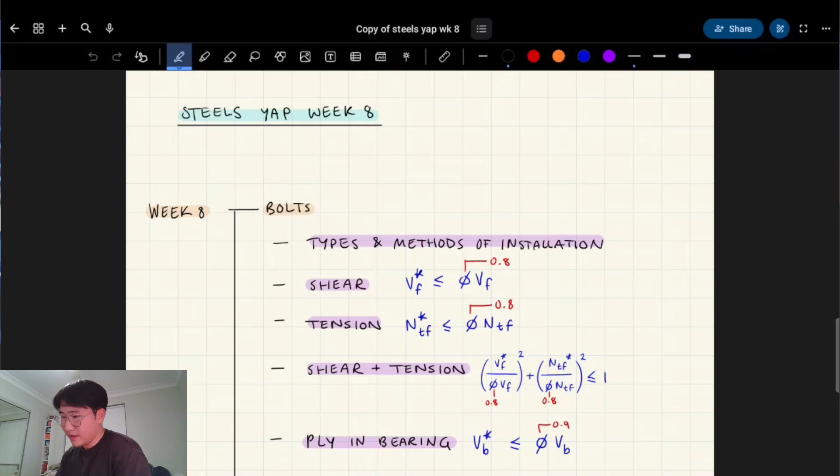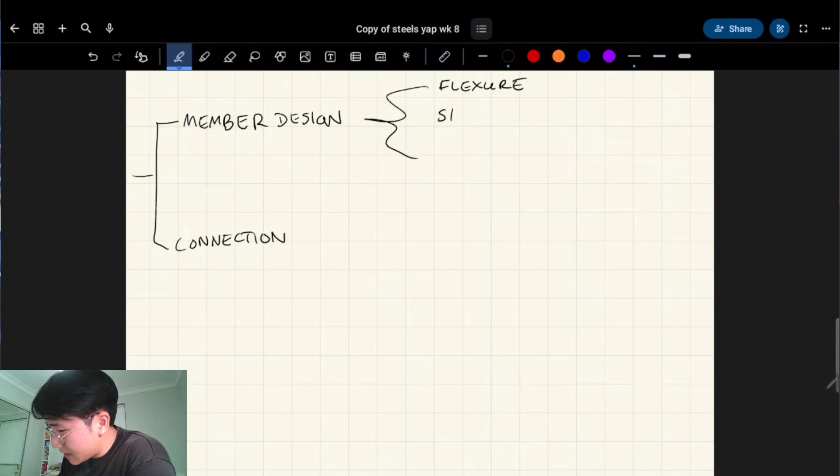Basically, within the connections topic, right? Actually, let's start even more overall. We have members. We have member design. Maybe that should go above because that's arguably more important to begin with. Member design for steel, right? And then that's where you do everything like your flexural checks, your shear checks, compression, tension, all these things. And we've kind of ticked through all these things now. We kind of know them, right?

Connection design is a little bit different. So connections is basically how two members are connected. It's kind of more like a later stage design thing, I guess you can say. It's just as important, but how members actually link together and are physically assembled, that's quite important, right? Because that's how you actually end up building it. So to do this, we have bolts and we have welds.

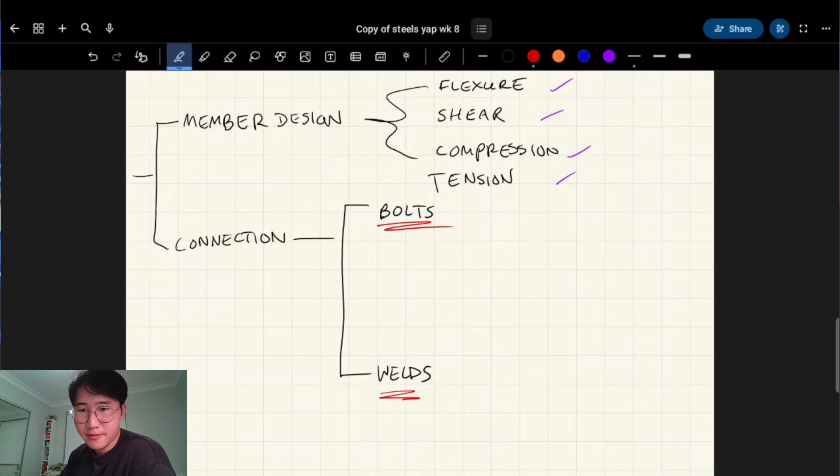Bolts are generally cheaper and are easier to assemble. You have your blueprints, which is like the same as a Lego instruction manual, basically, just to be able to assemble things with bolts. With welds, it's a little bit harder, unless you can prefabricate it in a factory. So sometimes you have these big members, and plates and things like that can be pre-welded so that you can bolt things together, and that's done in a factory. That's completely fine. For welding on site, that's actually quite difficult, and you try to avoid it as much as possible.

But welds, they essentially develop as strong of a... I'm finding it hard to explain this. So you have two members, two square hollow sections. This is kind of a weird example, and the other one's linking up to it. You can weld around the entire edge, and it's as if it was one square hollow section. The weld kind of fully fixes this connection. It has full rigidity and everything. For bolts, a bolt by itself is a pinned kind of connection until you have enough that it locks it in place, basically. Yeah, anyway.

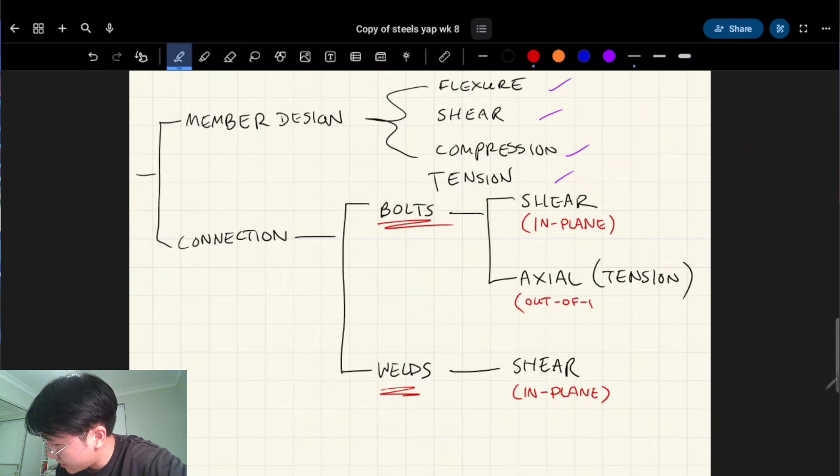So within these types of connections, we do two types of design. We do shear and axial, specifically tension design. For welds, we just deal with shear design in this course. That's not to say welds don't take on axial forces, but in this course we just deal with it like that. Shear we call in-plane loads, and this is also in-plane, and axial design is out of plane. Okay, I'll explain that in a second. Maybe I'll just draw up some examples.

So say you have a frame like this, and you're trying to prevent wind loading on it. So you might want to have bracing on it. If we zoom in on the bracing, you might find that this piece of bracing can't fit on the truck because it's too long. Let's take a step back for a sec. In the middle here, we might have a way to interlock these two members in a shear connection. So it might look like this.

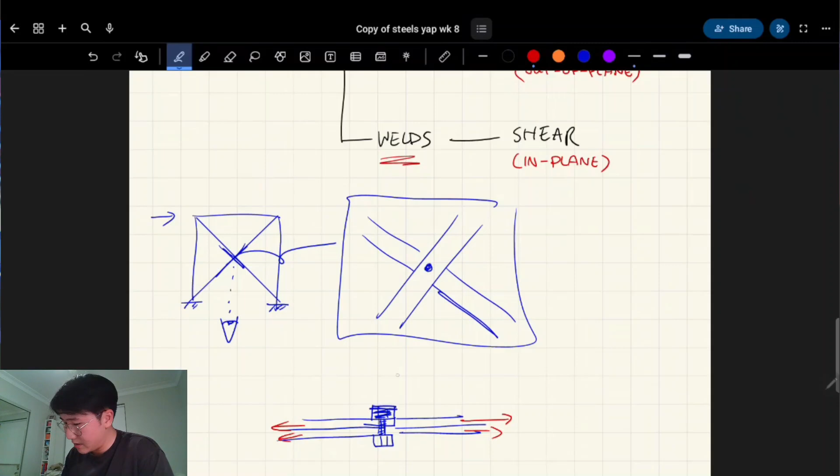Now that bolt that I've drawn here in the middle, let's zoom in. That bolt is in shear. I might draw it from the other perspective, as an eye looking at it. It might look like this. Okay, that's a bit trippy because it's an X, but that's your bolt. It has the shank with the threads, and then connects up to a washer. If there's tension or compressive forces here, axial forces acting, the bolt is in shear because this is essentially wanting to shear like that. So we say that that bolt is in shear because the bolt is perpendicular to the members.

Does that make sense? I just want to make sure I'm not just saying random stuff. No, that makes sense. Okay, fantastic. All right, good. Stay with me.

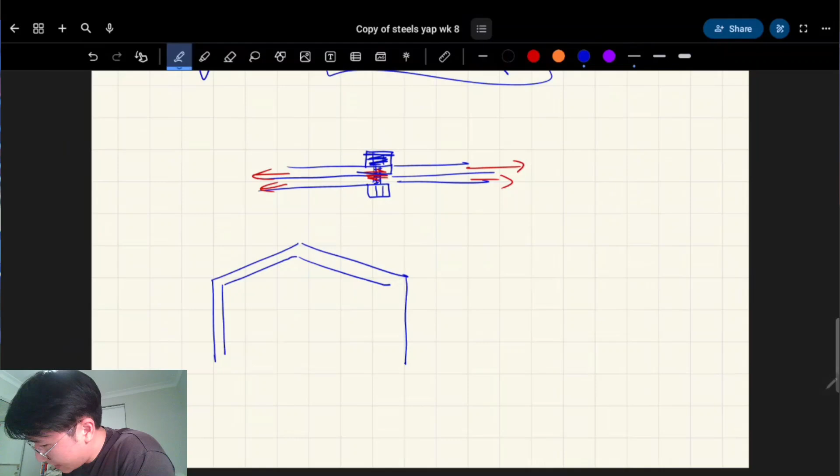So next we'll talk about axial bolts. Say we're designing a warehouse. Up the top there, that's the roof of the warehouse, and these are called rafter beams, and they're attached to these columns, and this makes up one portal frame. Now, you know how for a second I was trying to explain something here?

Imagine that these rafter beams are quite long, right? Say this entire span here is like 20 meters or something, right? And on a truck, I'm gonna try to draw this. On a truck, this isn't a very accurately drawn truck, but these members can only be max 15 meters, something like that, right? So they have to be less than 15 meters.

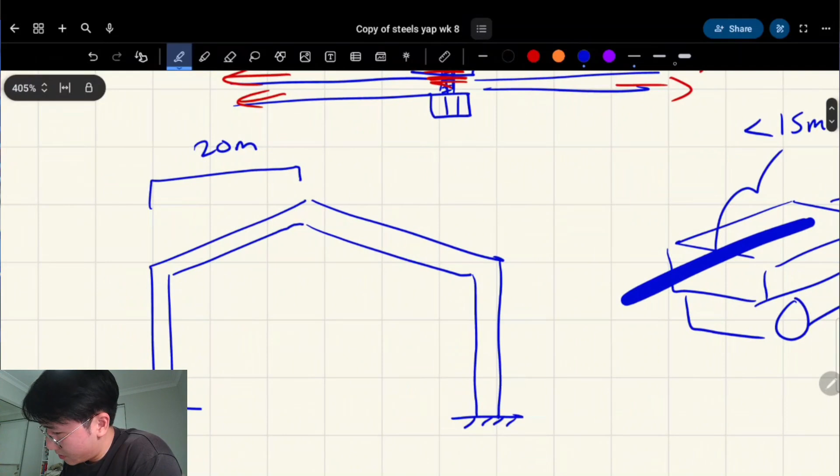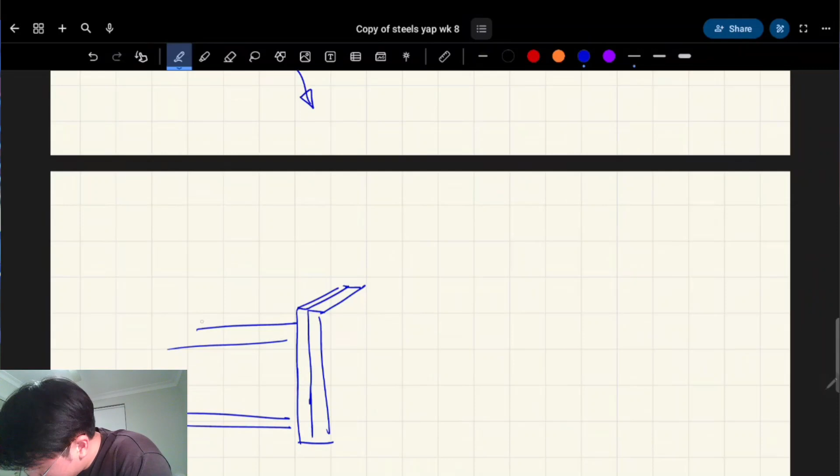So if you want to basically connect up this big portal frame, you want to essentially put multiple members on the truck like that and find a way to connect them together, right? And so let me just draw that there. That's the bottom of the page. That might look something like this. I'm going to draw a perspective drawing. And these are, say, the I-beams or whatever, right? Like that. It's an I-beam.

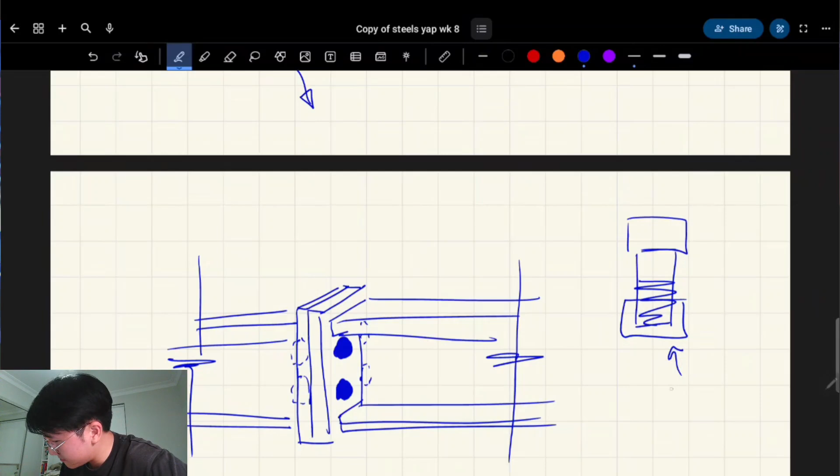That continues. And we have these bolts, right? These are axial bolts. Here, and there's some on the other side, but you can't see them, right? And then they have also got a nut basically on the other side, which locks it in place. It's something for the threads of your bolt to bite onto, and you twist it, tighten it, and so that's the nut. So your bolt, those are your threads, right?

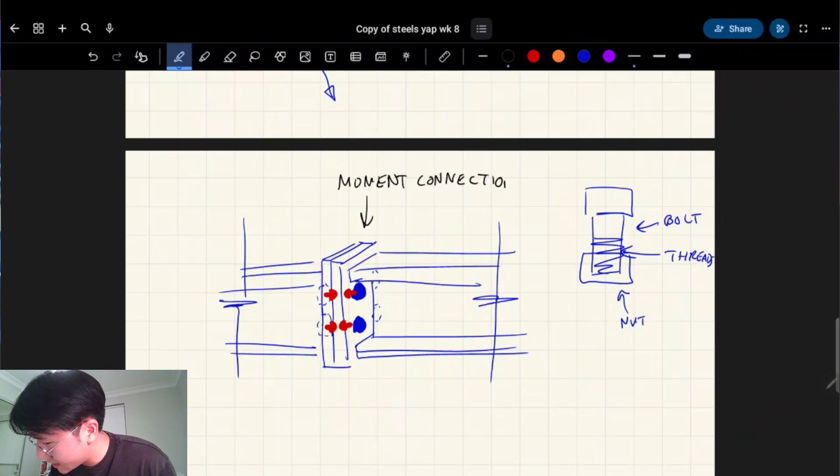Okay, but do you see how they're axial bolts? Because when you tension them, you tension them by tightening them, and then they kind of compress and lock it in place. So that's kind of like the definition of an axial bolt. And then it develops what's called a moment connection, as opposed to a pin connection. And so this essentially acts as one member, and you can treat it like one beam across that rafter when you do those kinds of connections along here. Does that make sense? Yeah. Cool. Shear bolts, axial bolts.

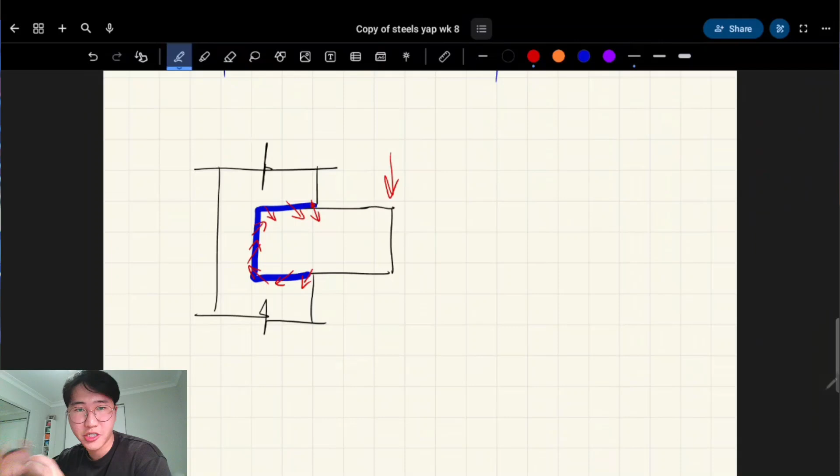For welds, I'll just show you what shear on a weld might look like. So say you have a column. This is one of the example questions. And we have this plate that we weld onto it like that, a rectangular plate sticking off this column. If we apply a force like this, it's going to cause this weld at various points to want to shear, but in different directions. There's a moment portion of it, and then there's a force portion of it, but all of these points in the weld are shearing. So that's what a shear weld connection looks like. Does that make sense?

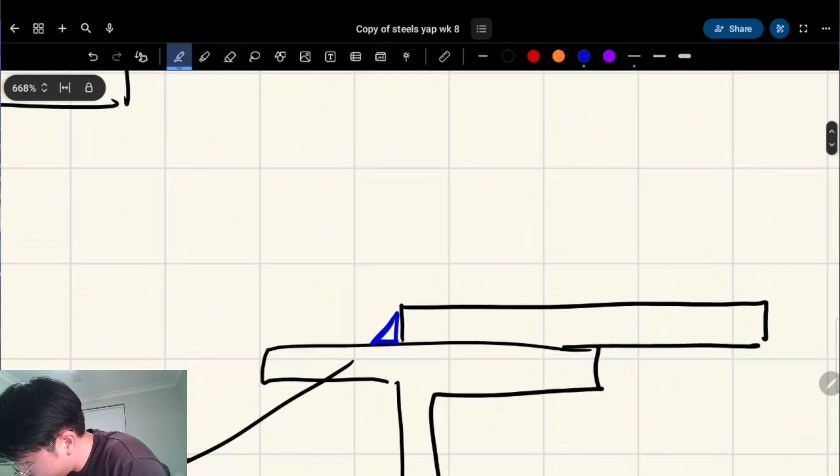Yep. Vina, you said I don't know. Oh, it's all good. I was just confused because does the weld stick out like the plate? Oh, okay. So if we look at this side on, that's your column, a UC, and the plates would come out like that. And then the weld has this fillet shape. I kind of just drew it on top, but it would probably more be like that. Okay.

Any other questions? Actually, one last question. In terms of the weld, you see how it's on the three edges of the plate. Would it also be underneath the plate? Yeah, you're right. I think what I did by accident is I did a cut like that. So it would only show that part of the weld. But based on what I drew, you're right, it should be like that.

No, as in underneath the plate as well. You know how there's three sides attached to the plate. Is there potentially one other side as well? So on the back? Like, from the bottom? Yeah, on the back. I know what you mean. You could. I feel like it might be overkill. Yeah.

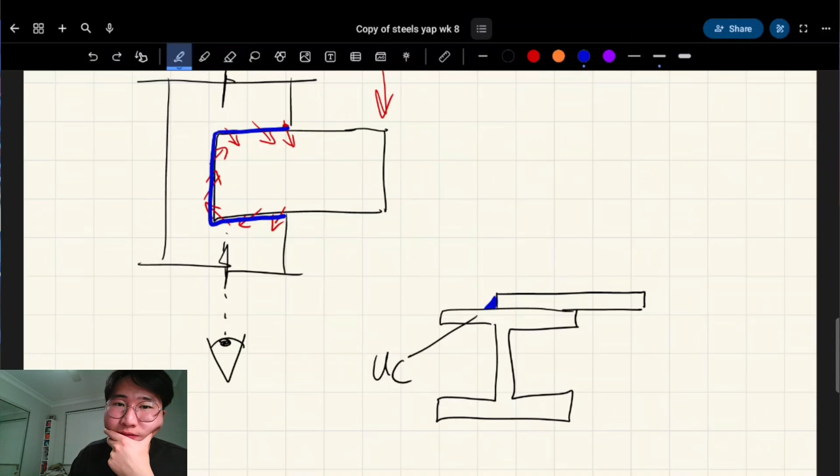It all depends on the numbers. There's nothing that specifies you have to weld every edge, which is kind of adjacent. You're talking about if there was a bit of welding on the back, right? That's the point I was referring to. You could do that, but I'm just thinking it might be unnecessary diminishing returns, and it might take longer if this is like a repeated detail around a warehouse, for example—it would be quite time intensive to do something like that. But I don't know, it depends.

That's the answer. But yeah, all good, no that's all good. Any other questions right off the bat?

Nope, all good. Fantastic. Okay, let's talk about this. When I show you this and this, just have a guess on what that means. Oh, actually it's right there—the design. You've seen these variables before, right? Earlier in the course. Yes, almost.

V stands for shear, right? N and T stand for tension, right? That's what we're designing for.

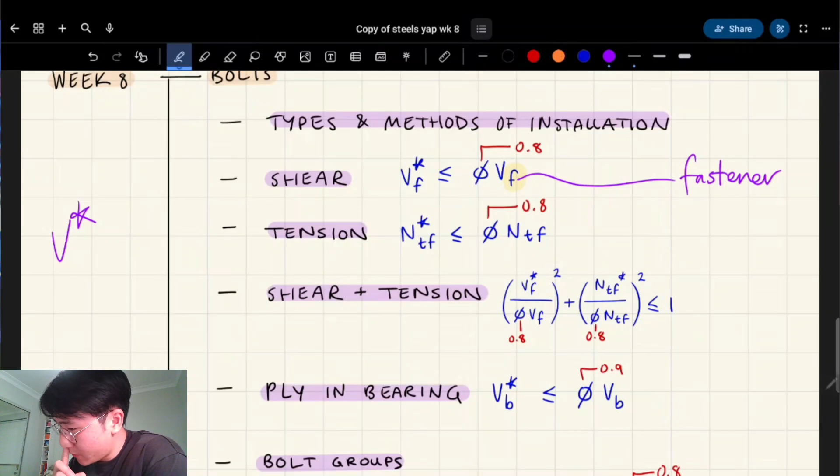So when you see F, it refers to a bolt. So N star, V star—that would be for a member. But once you add in an F, that's for a fastener or a bolt. And you'll see for the week 9 notes, V star W means the shear on a weld. It'll be more like this actually for that one, but I'll explain it later.

Okay, cool, I want to make a comment quickly. Do you remember how, let's just say for the shear topic for members, this part was relatively easy to find, like in your workshops or whatever—it's just from the shear force diagram for a member, correct? And then this is where you have to go through like AS4100, the code, and through the aids, right? Yeah.

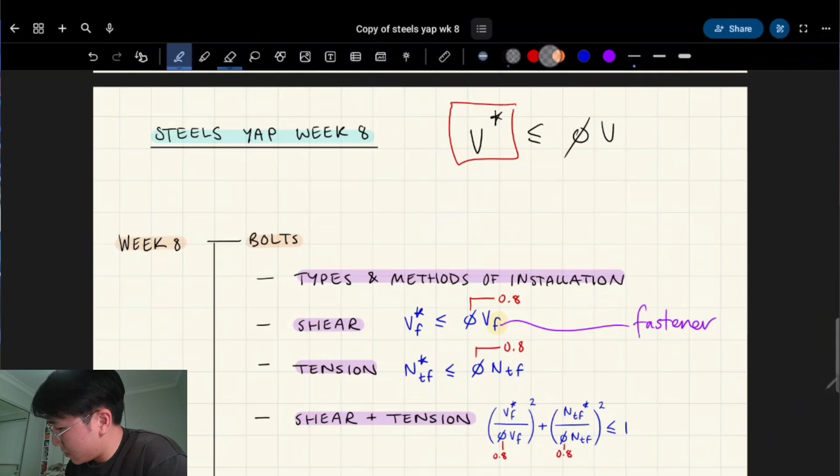And so it's a bit different for bolts, because for bolts it's the other way around. This is actually the thing that becomes hard to find, and the capacity is quite easy to find—it's just a matter of looking at a table which has design values already on it. So that's what to expect.

Let me show you what this ends up looking like. I'll just quickly talk about these as well. Will I? I don't think I will. I'll talk about them when we get to it. So...

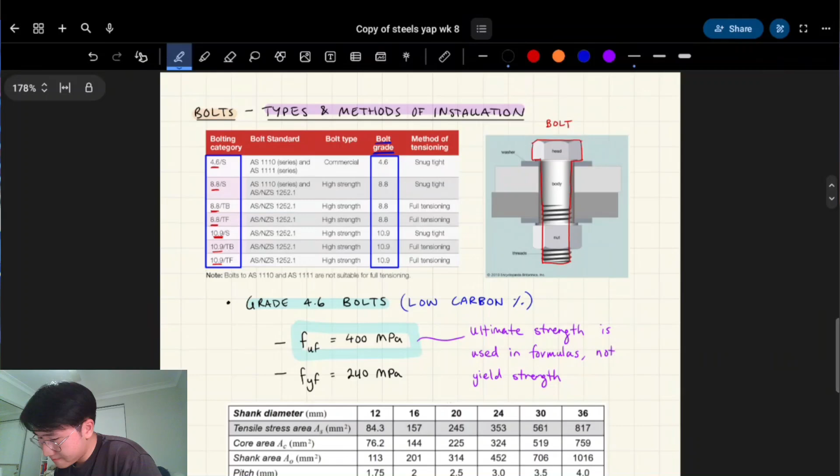We have this table here, and you can see that as the number goes up, the bolt grade—that's representing the bolt grade essentially—you can imagine that means it's a stronger bolt. It can take on more, it has more strength basically. So we have grade 4.6 bolts, 8.8, and 10.9, which isn't in this course. It's just to do with the amount of carbon in it.

I just had a really bad feeling I'm not recording. Okay, no, we're good. Alright, we're good.

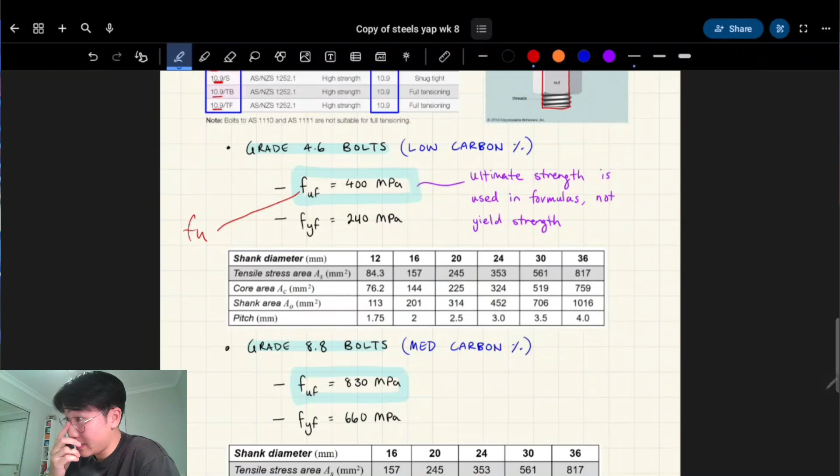So we use ultimate strength in the formulas, not the yield strength. This is for shear, and this is also for tension. Now, for members, we only ever used the member ultimate capacity for the case of tension, specifically the fracture on the net section.

So we use it here partly because—I'm kind of just theorizing—but for members you want to be a bit more conservative because there's only one member. But for bolts, from my understanding, since you have bolts acting in parallel to each other, you're allowed to use the ultimate strength, if that makes sense. If one of the bolts fails, or quote unquote yields, it's not the end of the world because the other bolts assist it, and then they reach a point past the yielding point.

Anyway, maybe I'll just quickly draw a curve for this, but it would look something like this, where that's the yield point, and then together the bolts will reach the ultimate point because they're acting in parallel, I guess.

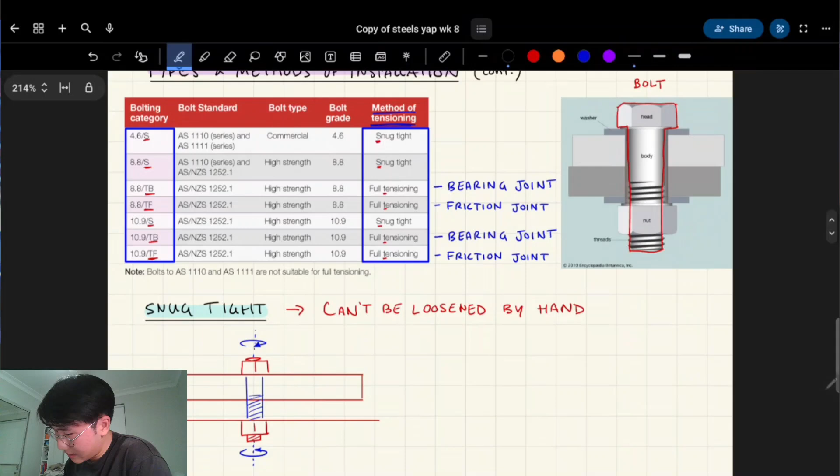Next we'll talk about methods of installation: snug tight, and fully tensioned. Basically, snug tight means you can't loosen the bolt with your hand—you've twisted it so much that you'd need some kind of tool, could be a wrench, could be a power tool.

You've twisted it so much that it can't be loosened by some dude, right? I think in the code it says cannot be loosened by hand by a 100 kilogram male adult or something like that. It's very specific, but yeah, it's just saying by a tradie, it can't be loosened.

So for a fully tensioned case, you get it to that point and then you keep going, to the point where this part in the middle yields. So here we actually want to encourage yielding because then there's more compressive force, because you've over-tensioned the bolt essentially, and it has a tighter grip, and it won't loosen as much over time.

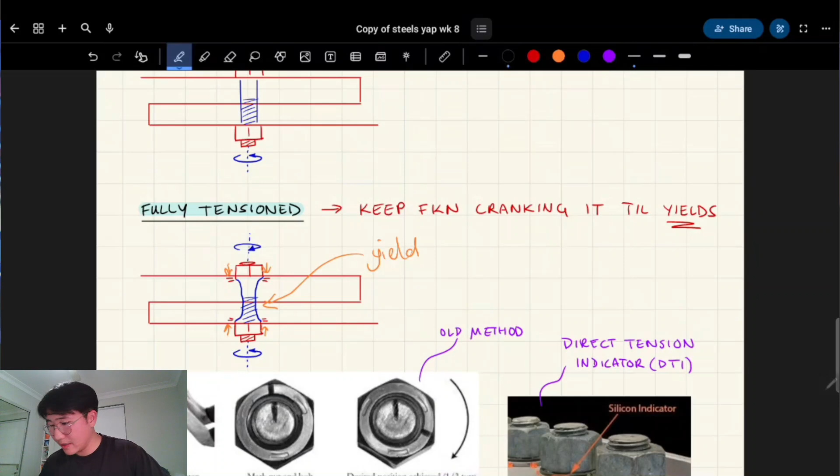This is important for, if I go back to those examples I was talking about earlier, moment connections, because if you can imagine, if this was just snug tight - this is a really important member in our warehouse, it's the moment connection for the rafters - what will happen is wind might blow on it. So there's like an extreme case, a cyclone or whatever. It will repeatedly blow on it over time and loosen the bolts, if it's only snug tight, over several decades or something. Say there's a cyclonic area, then this will eventually come loose and it'll be really dangerous, because the structure could fail.

So these have to be fully tensioned. Fully tensioned is the more extreme type of installation method, because when you fully tension it, it can't loosen. Essentially, it's kind of internally warped and fits in the groove of that connection, if that makes sense.

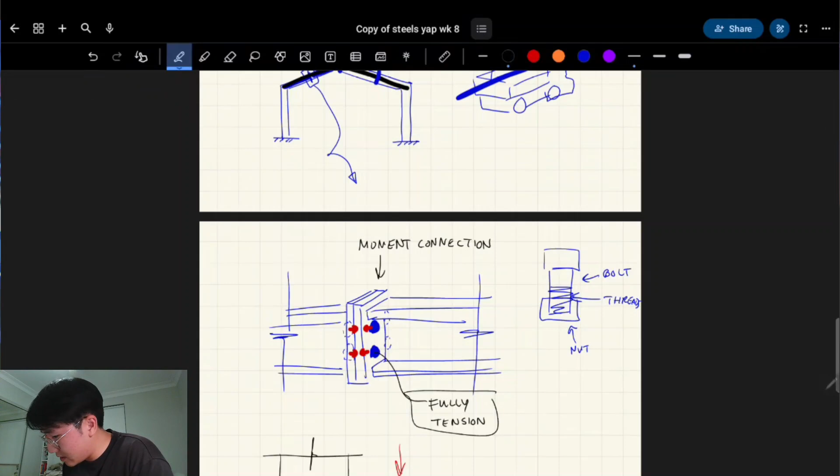Wait, sorry, did you mean to scroll down? Were you writing stuff? Oh, have I done something wrong? Oh, no, I'm just using my hands in real life to talk, but I don't think you guys can see that. Oh, okay, oh good. I thought you were writing something that wasn't on the screen. Oh no, sorry, but I don't know.

Does that kind of make sense? So you want to fully tension what you can see. This kind of moment connection should be fully tensioned, basically. Yep, yep.

Now, for the case of this bracing, for example, does this need to be fully tensioned? Someone want to have a guess? Sure, yes, it requires to be fully tensioned. Not really, because for shear bolts, they just need to be snug tight. The consequences of this failing is way more minimal.

To some degree you want this specific connection to be pinned, to act as kind of like a truss member, I guess. I might just be speaking out my ass at this point, but no, this one doesn't need to be fully tensioned. It just needs to be snug tight.

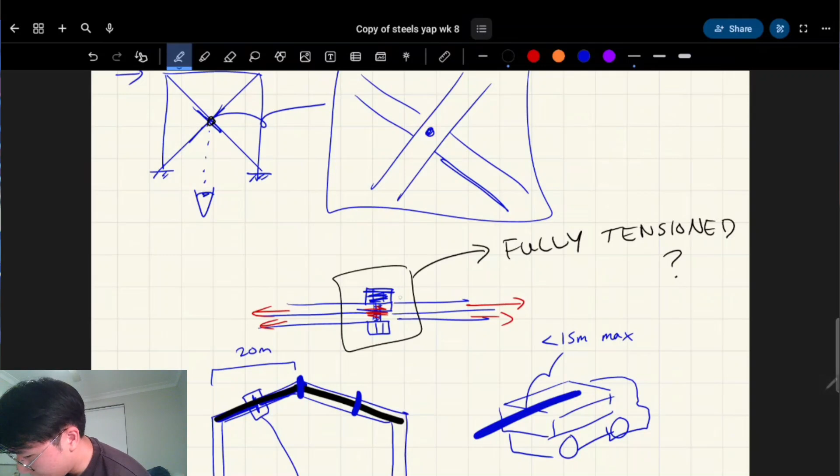It would be kind of overkill to make it fully tensioned, essentially, just because it requires more effort to fully tension it. I think you need some kind of specific machine to come around and do it. And if you need to do it for every bolt in a warehouse, it's gonna take forever. Whereas for snug tight, a tradie with a power drill or whatever can get it snug tight.

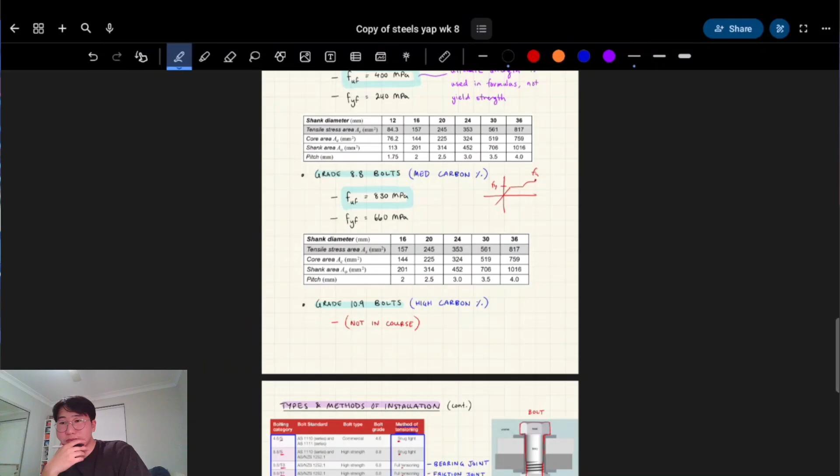So for shear force in general, you don't need to have it yield? Shear bolts, yeah, generally shear bolts, you don't need it to be fully tensioned. Oh okay, yeah, just one last question then.

So you have your shear bolts, and then you also have your fasteners. The fasteners usually are the ones that you fully tighten, is that correct? Sorry, I missed the last part of the sentence. Or does it depend - do you fully tighten for the fasteners, or does it not matter? Like does it only depend on the joint type, whether it's a pin joint or something else? Sorry, I'm not really understanding the question.

No, that's fine, you'll probably cover it as we go. No, I want to answer your question, I just didn't catch parts of it. As in, the example you just showed us, that was regarding a pin joint type or a shear bolt, correct? Yeah, I'll just go up to it. Yeah, and with those, you typically do snug tightening.

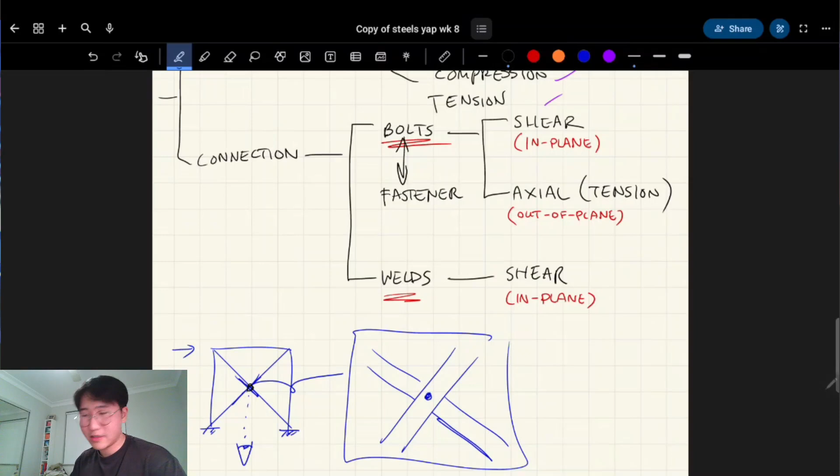Correct, but in that example, if instead of using a shear bolt, if we use a fastener, would it be acceptable to over tighten, or it wouldn't matter? It just depends on what the situation is. So remember, bolts and fasteners can be used interchangeably as a word. Are you talking about if we made this fully tensioned? Yeah, that's correct. You could.

It's just more a matter of this is usually a repeated thing throughout a warehouse, right? These kind of connections - say a warehouse has like 200 members, it might have like 2,000 connections. So that time that you invest in fully tensioning each one would just be a waste, essentially, unless you have to do it, which you do for axial connections.

Does that make sense? Yeah, that makes sense. There's nothing wrong with fully tensioning it structurally, as far as I can see. It's if you did it the other way around - if you made this snug tight, that would be dangerous, like the axial one. But this is more like bolt design, I guess.

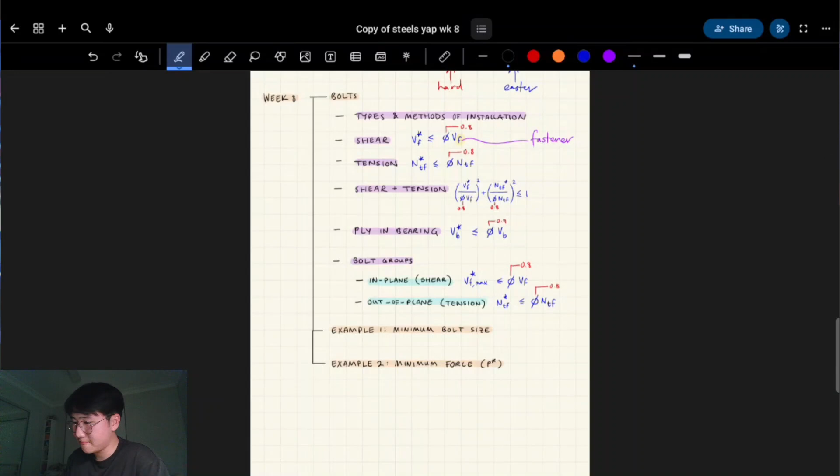For anyone watching the video, you can see my webcam - my light in my room just randomly turns off every now and then. It'll turn back on. It's just fucking weird.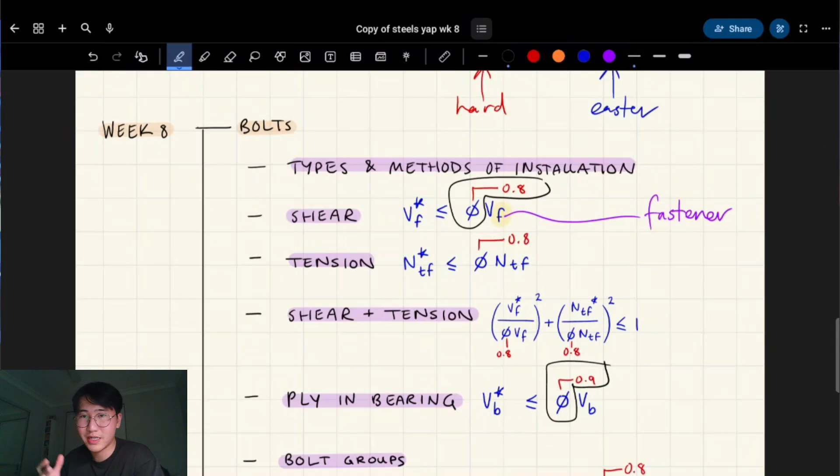Okay, don't be caught off guard in this course. So for bolts, our phi value is 0.8, except for ply in bearing, which is 0.9 - that's another action which we'll get to. But yeah, because for the entire course, for all the member design, you've been using phi equal to 0.9. Now it's 0.8, so just don't be caught off guard, please.

Sorry, I'm going to have to speed up because I don't want this to go on for too long. So here's the formula for bolts in shear - it's to do with your ultimate strength, which we talked about. There's a reduction factor for 10.9 bolts, but we said those aren't in the course, so don't worry about it, it will just be 1. There's also a reduction factor for bolted lap connections.

So that's like what you can see there on the right. If you have a bunch of bolts in series and the lap length is too long from the first bolt to the last bolt, you have to reduce the overall strength of it, because some of the bolts, if they're being tensioned, aren't all going to be correctly aligned and doing what's supposed to be done in shear - which is contact the hole's edge, if that makes sense.

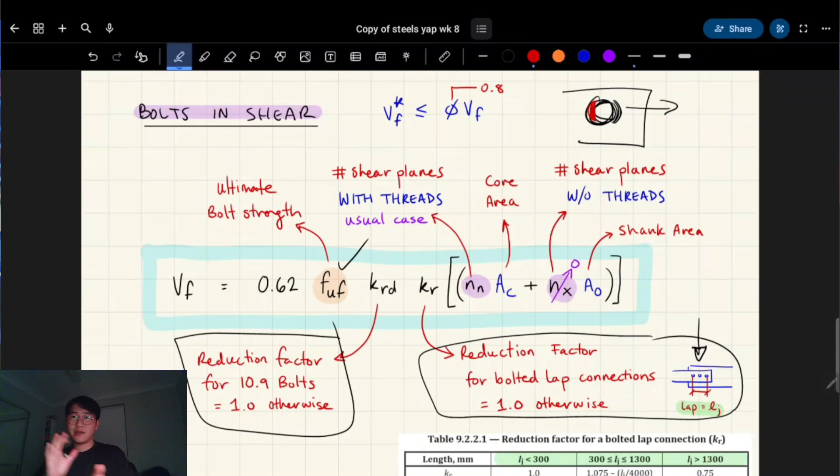So say this member's being pulled that way - the bolt is kind of crushing against that ply of the member. But if you have multiple of those in a row, they're not all going to be equally contributing to that, just because of small manufacturing errors. And so when you have a long enough lap length, you have to reduce the capacity.

Okay, and then we have this thing which I tried to explain, which is to do with your core area and your shank area, and it's to do with having multiple plies. This is quite an extreme example - just pretend it looks like this: you have 4 rectangular plates that are all lapping over each other, kind of like if all of us put our hands together and did one of those celebration things. That's what it looks like, and side on, it looks like that if you chuck a bolt in the middle.

And so there's 3 shear planes going on - 1, 2, 3. Now 2 of these shear planes are intercepting the threads - the threads are the screwy part, essentially - and 1 isn't. So that's what NX and NN are: the number of shear planes intercepting the areas with threads and the areas without threads. But it doesn't matter because all we care about is the number of shear planes, and we always assume it has threads to be conservative in this course.

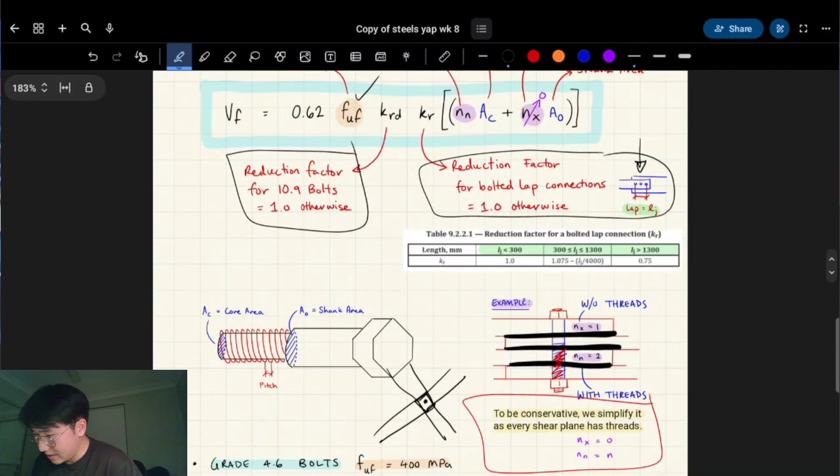And so you're just counting the number of shear planes and then multiplying it by the core area. So core area was the smaller area here, and then shank area is the bigger area there.

Yes, okay, so for bolts in tension - that was shear, that was bolts in shear, now bolts in tension. This formula is a bit more similar - the formula is a bit simpler, I should say. But we use something called AS, which is basically in between the core area and the shank area.

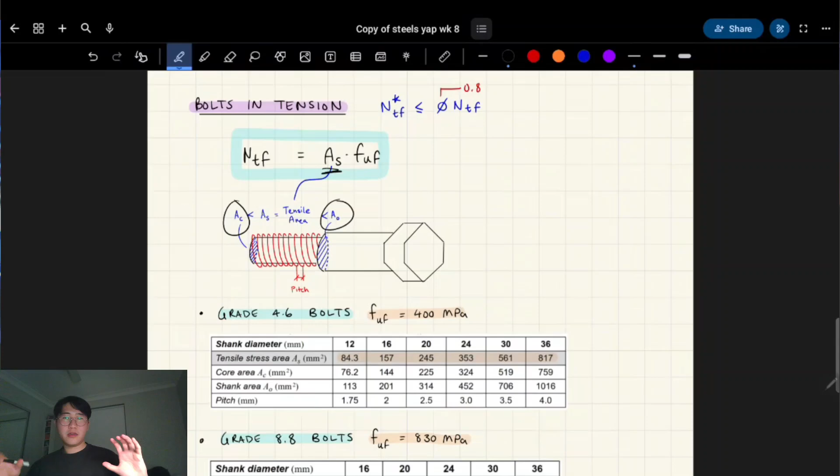Shank area is AO, core area is AC. AS is a number that's in between there, and it's almost saying, okay, we're going to treat it as if it has this kind of area and it's a cylinder the whole way - well, not the whole way, we just need one cross section, but that cross section that we take is AS. Now this is just given in a table, but be aware you're going to need to look at a separate row on this table as opposed to core area and shank area. Am I making sense so far? Is this okay? Yeah, okay, fantastic.

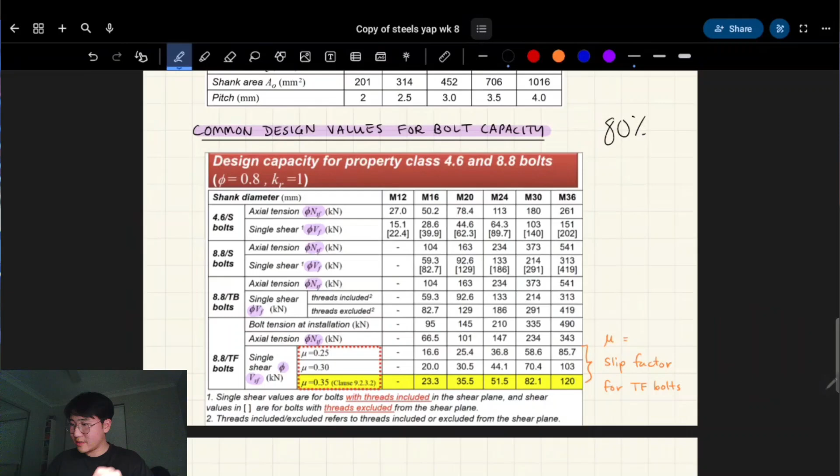80% of the time it doesn't matter because we just need to use this design table, which gives you the answers already. When I say 80% of the time, what I'm talking about is if you only have one shear plane like this - that's called single shear - then you can use this table.

But if you have multiple, like that example I was talking about with the hands in the middle, then you can't use this table anymore. But these will give you the value for phi VF, and it's already factored - they've already taken 0.8 as the factor, so don't double reduce it. Do you know what I mean? Does that make sense?

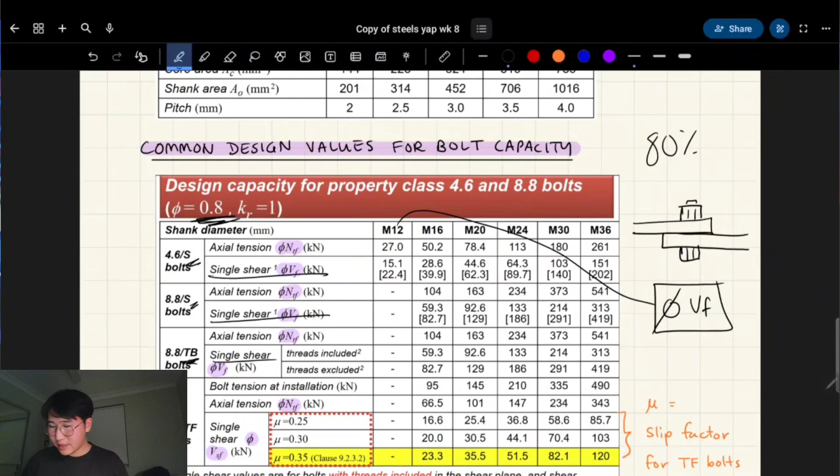And then it'll tell you in the question whether it's snug tight or fully tensioned. Keep in mind there's two types of fully tensioned: TB means the bearing type, and TF means the friction type. There's nuances there, but it's in my notes above, but I'm not going to go into it just because I'm conscious of time.

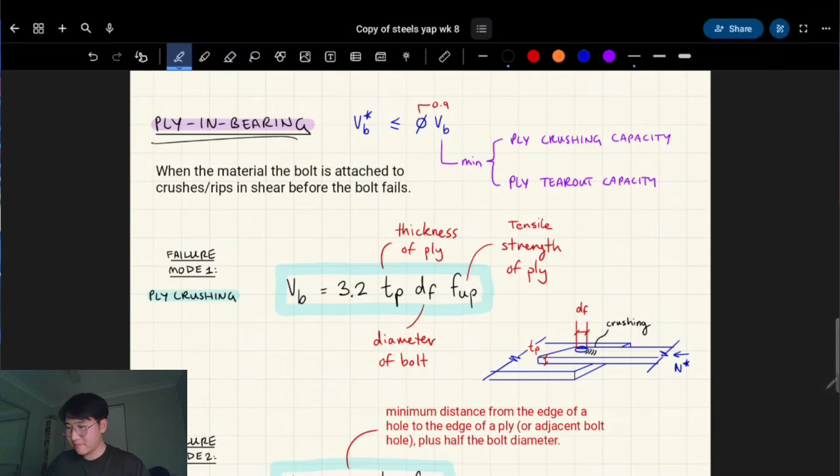Imagine you have your bolt being sheared like that - that's shear failure of a bolt. Now say the bolt is being pulled - this is axial, or I guess it's called axial because it's compressing two members together. Now this is tension failure. That's the bolt ripping in half in shear, or becoming like spaghetti and eventually just snapping in the middle for tension.

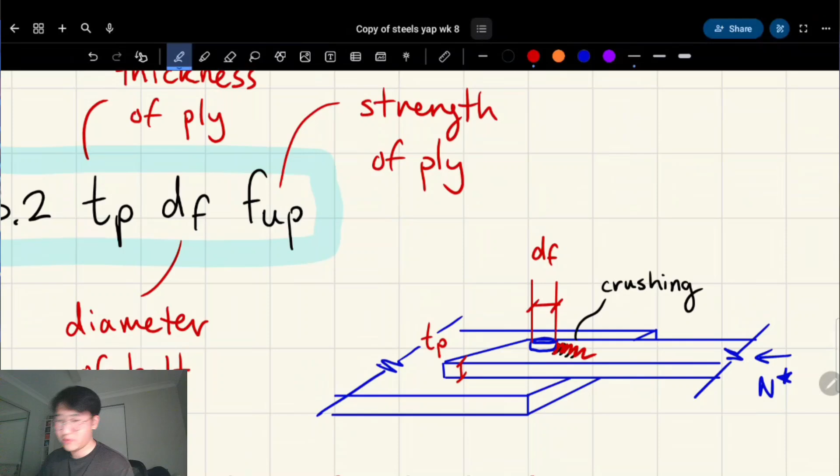Ply failure is a bit different because in this case this is compression happening on it. It's if the ply breaks, so the thin sheet of metal breaks rather than the bolt. It's still considered a connection failure, but it's to do with the ply failing rather than the bolt. The bolt can be fully intact.

Similar to this is ply tearout. That's if your bolt is near the edge of a ply and there's not very much - I don't have a better word for this - there's not very much meat on here. So it could essentially just tear out. That's what a tearout failure is.

Here I've got an example actually from work - it's where you have the bolt hole, so this has the bolt on it, and then next to it we have an empty hole. If there's tension acting on this member, the bolt could essentially just slip like that, and then you have this big gap and it's all loose - the bolt's just useless.

Make sense? Yeah. But that's tearout failure.

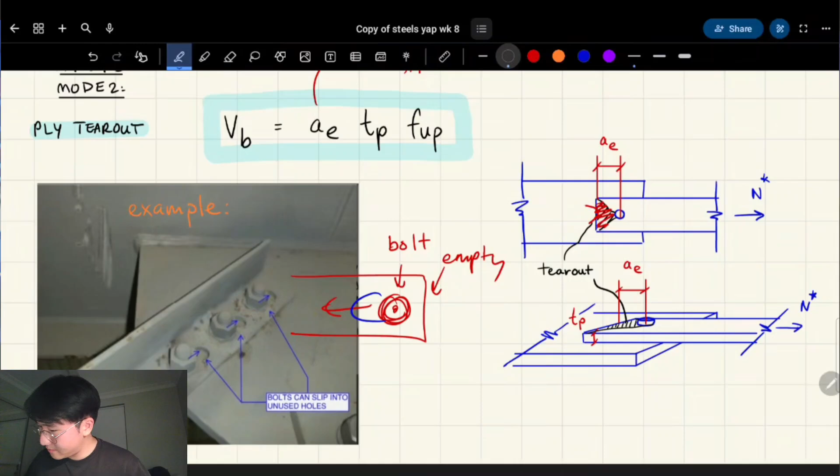Bolt groups - so I told you about pretty much everything that can happen to a bolt, but most likely, and this is the most common kind of thing you're designing for, you're more just designing for a bolt group. A bolt group means several bolts at once, and there's a bunch of formulas related to it, and that's actually where the course is going.

So you have to find the centroid of the bolts, right? And this is a bit different to, do you remember how, say you're trying to find the centroid of an I-beam like this, right? You would do, centroid is equal to sum of area... That. Yeah, just trying to find where the centroid is on the y-axis or whatever. You would use this formula or something, right? That should look kind of familiar. Do you see how the one on the left looks different? Yeah, it's missing the area.

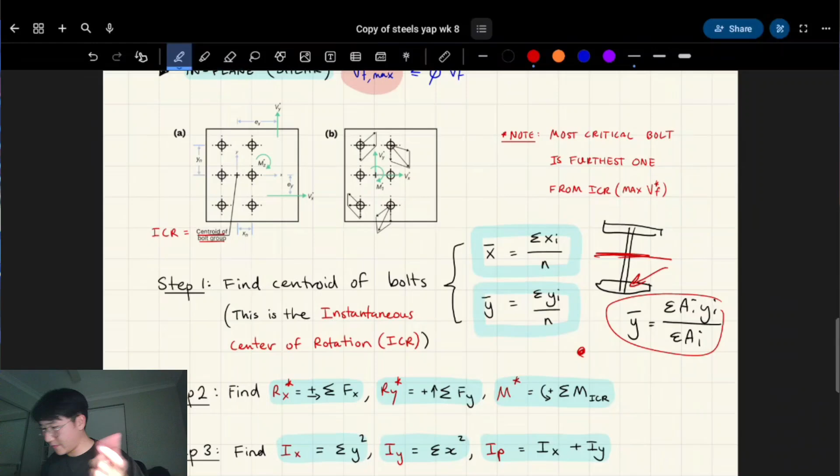Yep. It's because bolts are considered a single point in space, right? Whereas these are considered not only points, but points with an area, like your elements of an I-beam or whatever. So all the formulas that you see are going to be different. You're not going to be used to these formulas. So let me show you, for example, moment of inertia for an I-beam should look like BD cubed on 12 or whatever, without parallel axis theorem.

But here, it's literally just sum of y squared. And that's a result of the fact you're dealing with single points in space. So just be really careful when you're writing these formulas down. I made a bunch of mistakes. I had to correct the notes before I made this because I kept writing these formulas wrong, specifically this one and the one for the welds. There's plus signs, there's minus signs, stuff's just moving around. Just be really careful.

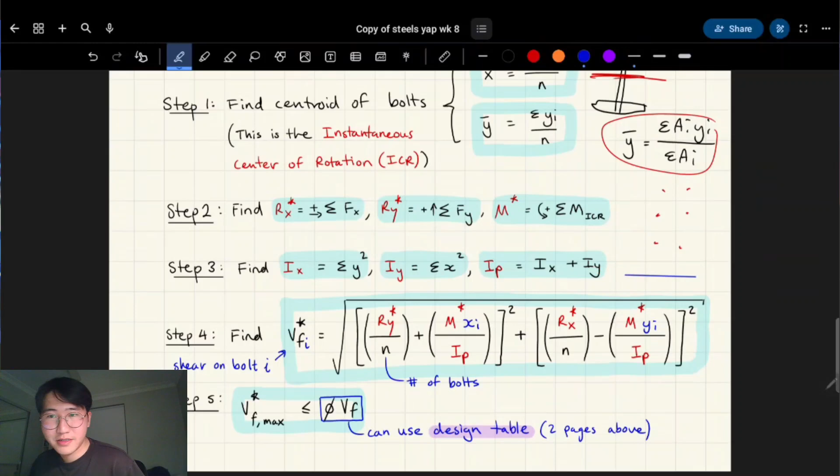So is it just the coordinate squared for Ix and Iy? Yep. Okay. The bolt formula is not too bad. The weld formula is where it gets trippy, because welds are straight lines, so they're one-dimensional. Area is two-dimensional, welds are one-dimensional, bolts are zero-dimensional, because they're single points in space, right? Yeah. So that's where it gets a little bit confusing. But you'll see all the formulas and they'll start to make sense.

Sorry, I'm hearing a little bit of background noise. Can whoever has that just try to mute, please? That's from me. All good.

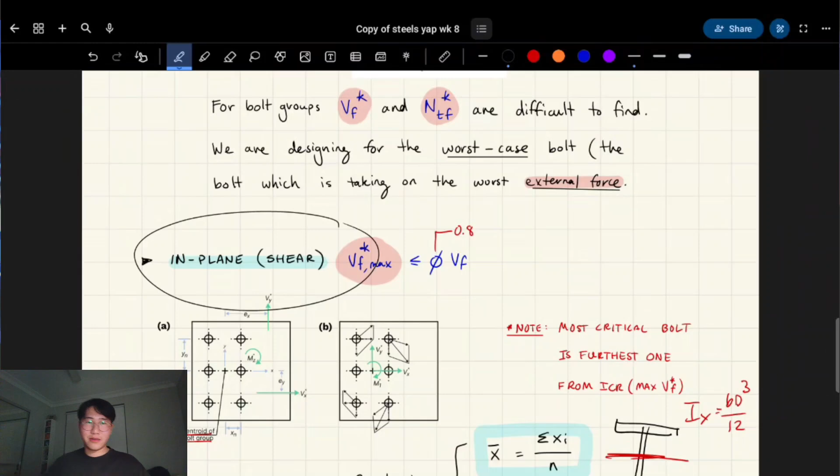You remember how we talked about shear bolts? So this is shear bolt groups, or in-plane action, so you're only going to be dealing with shear V. Now, for this course, I think this is a little bit rarer, but at work I've done this a bit more. Do you remember the splice connection, where we have the axial bolts connecting two rafter beams, like that? These are your axial bolts, and say there is moment happening on this rafter.

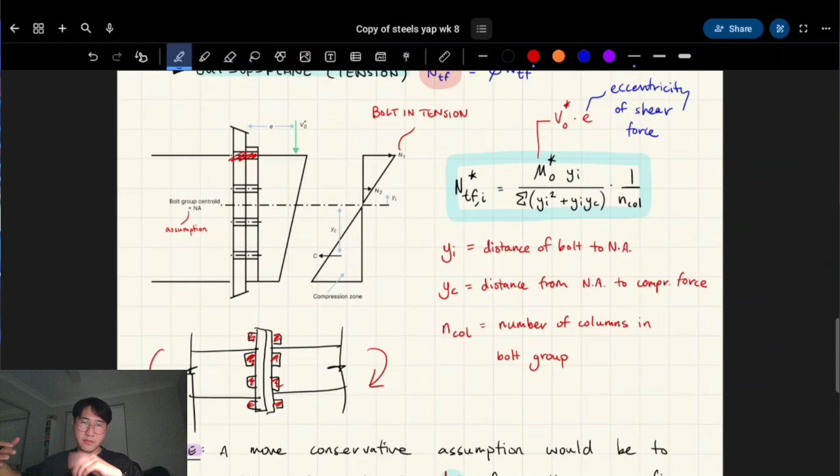Say it looks like that, so there's multiple bolts. We're making sure that the outermost bolt in tension doesn't rip apart, essentially. And this is assuming the centroid of the bolts is the neutral axis, so the bottom one is in the same magnitude of compression as the top is in tension.

Do you guys hear fireworks? There's fireworks outside. Yeah, I'm hearing that. Yeah, anyway. Interesting.

But what they do in the slides is they pretend that the neutral axis is off center by an amount of d over 6, because then it exaggerates how much tension is in this bolt, more tension, I should say. You guys probably have heaps of questions, but are you following? That's what I'm more interested in right now. Yes. I roughly get the idea. I think it'll make more sense in a question, 100%. Yeah, right now it all just makes no sense.

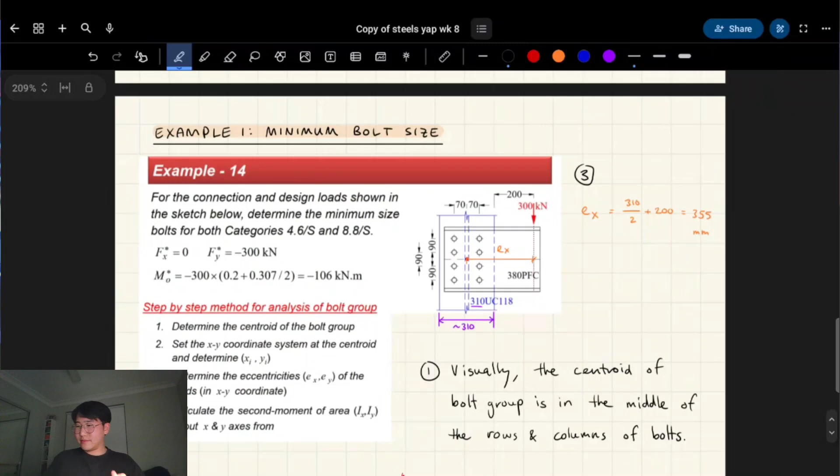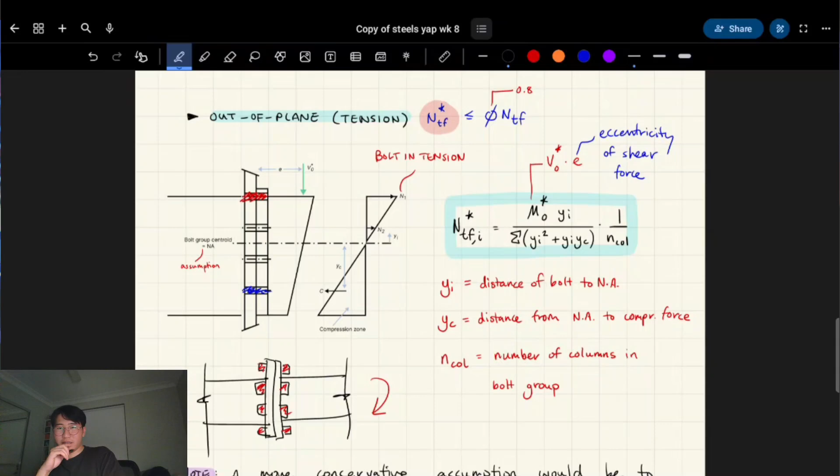With the d on 6, I'm guessing they just came up with that? Yeah, you know what, I don't know where that comes from. But it is conservative, because d on 2 would be the middle, right? Yeah, true. So d on 6 is saying a considerable offset from the center for the neutral axis. Someone came up with that. That's what's in the lecture slides, so I would follow that, and that's what they told me to do at work: do this assumption rather than the middle, because the middle one is not accurate. It's pretending that it's better than it actually is in reality. Okay.

So, next we have an example. So, you see this bolt group here, right? The first thing we have to do is we have to find the middle of it. And for this specific arrangement, it's actually really easy because you can literally visually see where the middle is, right? And that's like half the battle, just finding where the middle is for a lot of these bolt groups.

Because sometimes your bolt groups can be really weird. They can be like, I don't know, that or something. And then you have to do those centroid formulas, and then you have to set up like an axis here as a starting axis, and then once you get where the centroid is, say the centroid is like here. Now this is the new axis, do all your calculations from that. But if you can visually see where the middle is, you immediately set that as your coordinate system.

Yeah. And then the calcs work off of when you set the centroid as the coordinate system. It's sometimes called ICR. That's the instantaneous center of rotation. You guys probably haven't heard that since like 1300, but yeah, that's the same thing as the centroid for bolt groups and welds, right?

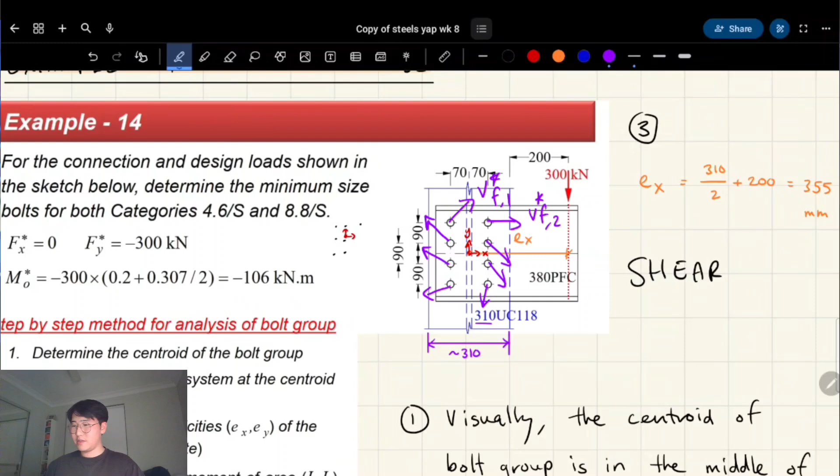So they all have different magnitudes. And what you're going to find is that the ones that are further away from the instant center of rotation have a greater magnitude. I might exaggerate this by a bit. Does that make sense? Usually the one that's furthest away has the greatest magnitude, but it depends on the numbers. And since we have 4 that are equally far away, then those should have the same magnitude in theory.

Okay. Have I lost you guys? Nope, I'm on board. Okay, fantastic. No, you're doing fine.

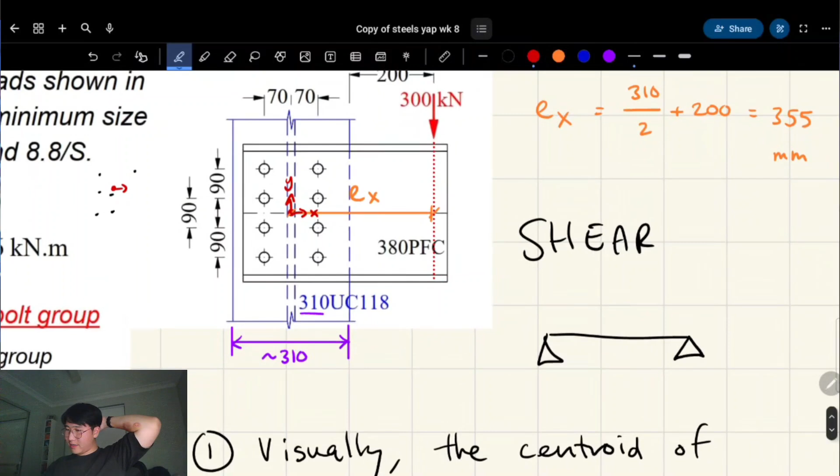Oh, fantastic. Okay, eccentricity, right? Have you guys heard that term before? Yes. So if you have a y force, let's just think of 300 for a second. We have a y force, and we want to take the sum of the moments about this point, right? This is, let's call it F. We have to find the perpendicular distance D. That's your lever arm, right?

So similarly, we essentially have this as your eccentricity, and the eccentricity is perpendicular to that force. So if this force acts in the y-axis, then this eccentricity acts in the x-axis perpendicular to it, right? Yeah, cool. That's essentially what we're doing. So we're taking the sum of the moments about here, and we call that M*o, I think. Yeah, here we go. So M*o is that force multiplied by ex, which is the lever arm. Oops, pretend you didn't see that.

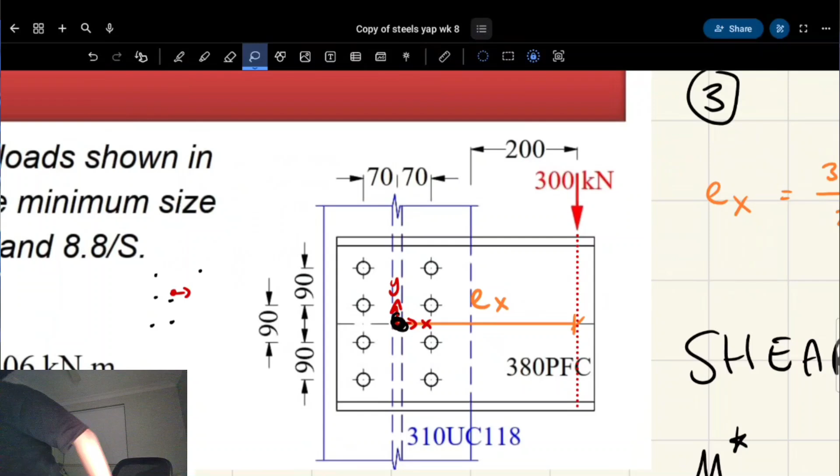How do you find ex based on these numbers? Don't you just use the 200 plus the 70? No, wait, sorry. But then we don't know what this distance is here, right? Yeah. So you're missing whatever this is. Yeah, that part. Anyone want to have a crack before I spoil it? Okay. If I go to 310 UC. Oh my bad, no, you're right. Go on. You're on the right track. Doesn't the 310 UC tell us the length of something like that? Correct. No, you're 100% right.

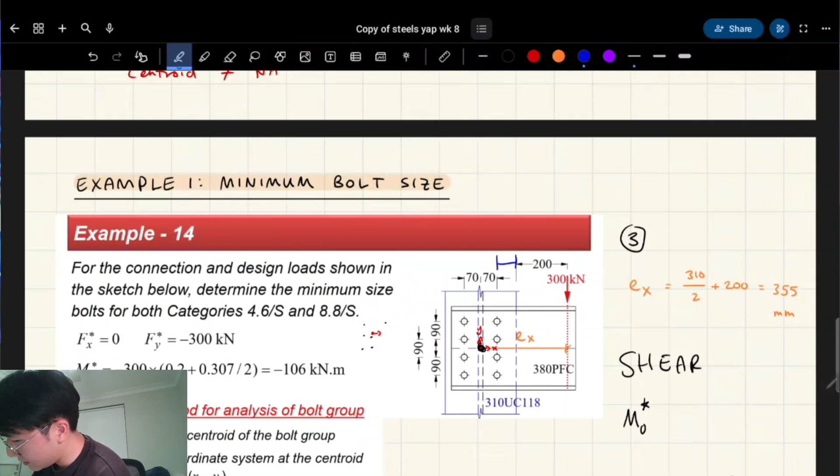So the way it works is when you specify a UB, say a 610 112 UB, that first number is always the depth. This is for a universal beam, right? In reality, it's not actually that. If you look on OneSteel, it's probably like 111.5, I don't fucking know, something like that. But it's pretty close, right?

The second number, this is your linear mass, kilograms per meter. That doesn't really matter as much in this course, but it's a good way of gauging how expensive the steel is, because the heavier your steel is, the more expensive it was to produce. So that's kind of, anyway. So the number you're looking at is the first one. So for a UC, sorry, I didn't finish my point. For a UC, it's both the width and the depth.

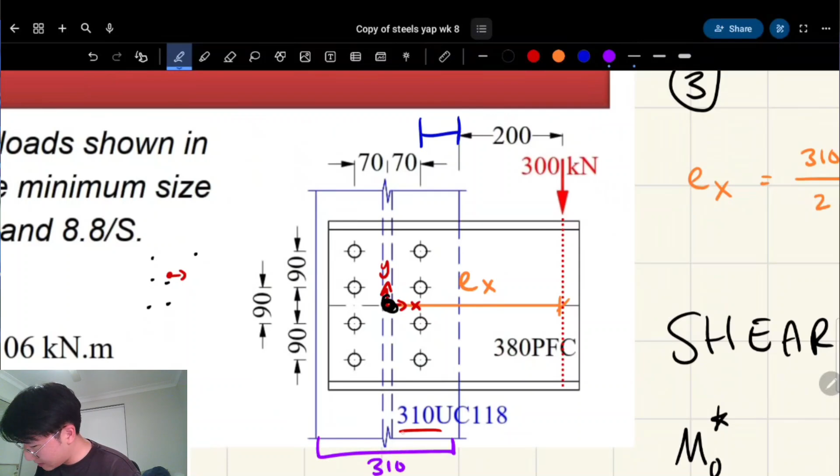Now again, these numbers are slightly different to 310. In reality, there'll be something slightly different. But yeah, that's the way you find it. So if this entire thing is 310, half of it is that length that you want: it's 155. Make sense? That's just a little trick that they put into this question for some reason. But that's one way you can work it out.

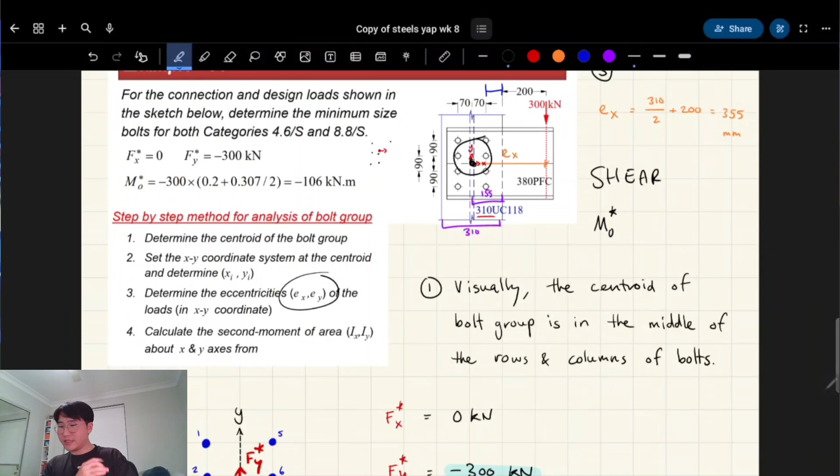Okay, so you find the centroid, that's step one. Then you set the coordinate system at the centroid, so that's what I drew here. You want to set that as your x and y system. You determine the eccentricities of any forces, and then we calculate the second moment of area in the x and the y direction. That's just a matter of summing y squared and x squared. Polar moment of inertia is adding the x and y together, at least for bolts; this is different for welds. And then you just chuck it into this big fat formula.

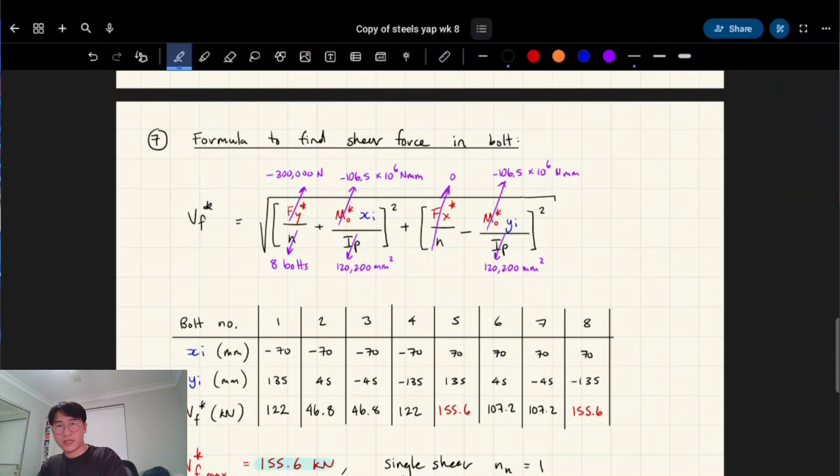But here's the thing. It might be worth doing it as a table. We just need the worst case bolt. But how can you tell whether bolt 1, 5, 4, or 8 is bigger? Generally, it's the one that's furthest away, so it could be 1, 5, 4, or 8. But we don't know; it depends on what forces you have. And so we found 5 and 8 are actually the biggest shear forces. These will have the greatest magnitude of shear, and there's V star F.

Everyone following? But then when you get to the point where you have to find the capacity, it's literally just a matter of reading off the table. So that's what I mean by the capacity is really easy to find. It's the external force that's hard for bolts. Cool. That's bolts. I'm going to try to quickly talk about welds because I'm conscious of the time.

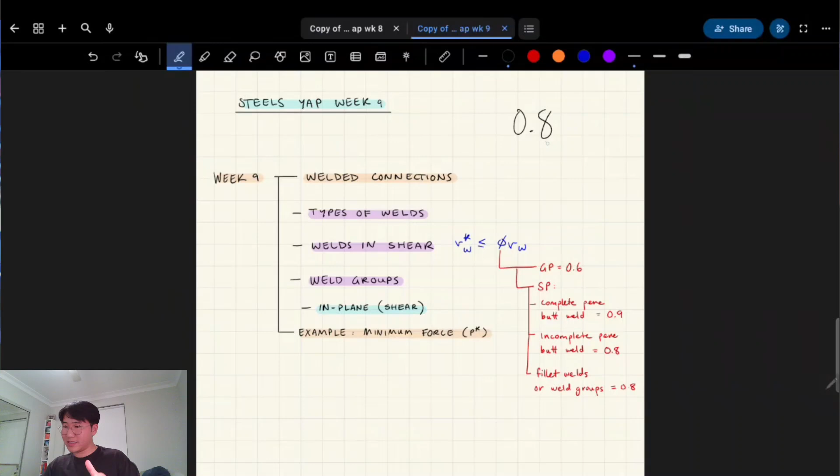With welds, a thing that's hard is phi. For bolts, phi is 0.8 for everything, 0.9 for ply in bearing or tearout, I think, one of those two. For welds, it depends on the type of weld. So let's quickly talk about the types of welds. Loosely, there are two umbrella types: fillets and butts. Fillets join two members, usually at a 90-degree angle. Butts join two members end to end, or generally there's a little V-shaped opening that the weld fits into.

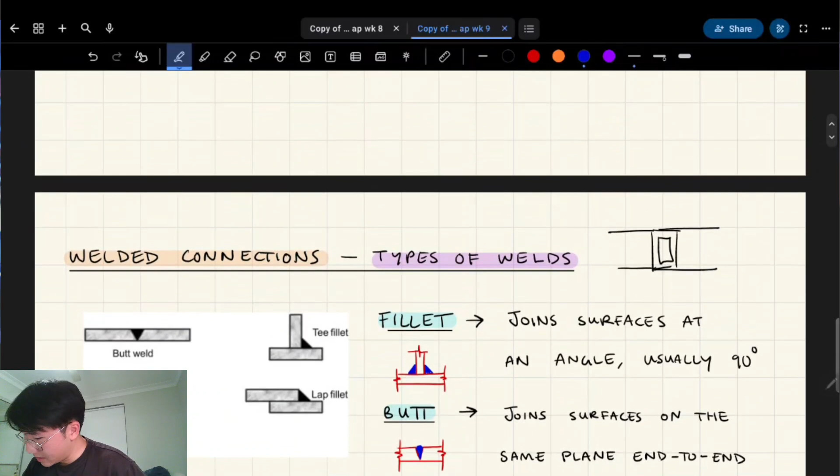So you know that thing I was talking about. Say we have two square hollow sections we're trying to marry together. What you would probably do is a butt weld at each of those edges. Okay. Weld quality. There are general purpose welds, and for all of these, the phi value is 0.6. Special purpose welds are more expensive, but they have a higher phi value, so higher capacity.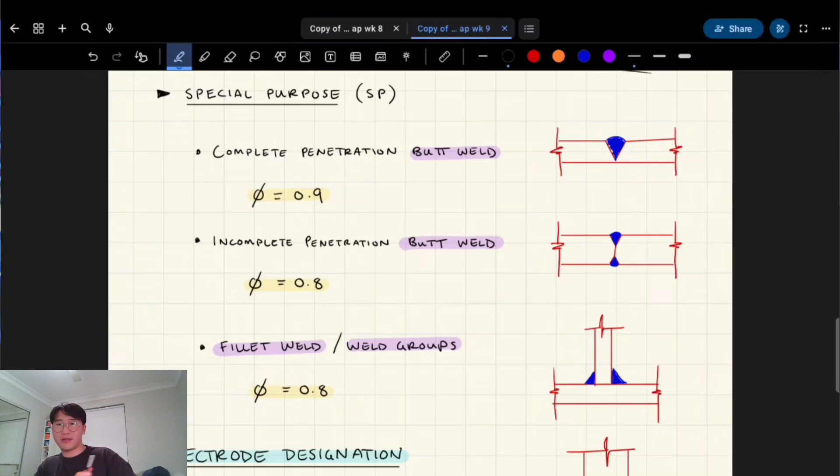Complete penetration butt welds, like I've shown, and incomplete penetration butt welds are a bit different; you can just see from the picture. But the important one is we're going to do weld groups in these questions, and that one has phi equal to 0.8, assuming that it's special purpose. But if it says general purpose, you use 0.6.

Electrode designation. When you're welding, you're going to use a different material, and it's similar to bolt grades. We have electrode designations, and the two most common ones you'll see in the course are E41 and E48. The good news is it directly corresponds with the strength values. Sometimes they might not even give you f_uw because it's implied from the electrode designation, so just be careful. The value we're using for capacity is the electrode designation times 10. Everyone following? Fantastic.

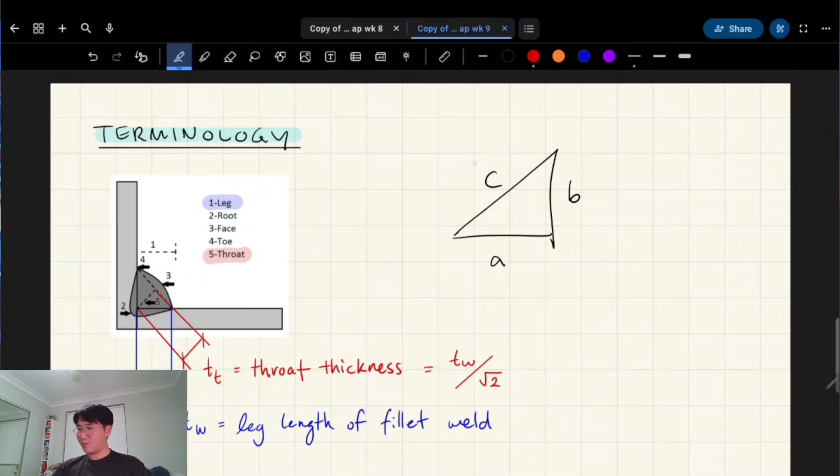Here's a bit of terminology, but the two you really need to know are the leg and the throat. Think of a Pythagoras triangle: the hypotenuse is the throat, and these are the legs. I bring up Pythagoras because you literally need to use it, but you use it this way. Oh, sorry, drawing this weirdly.

How do I draw this? It'd be more like this. Oh no, what have I done? Sorry. My bad. This is a leg,

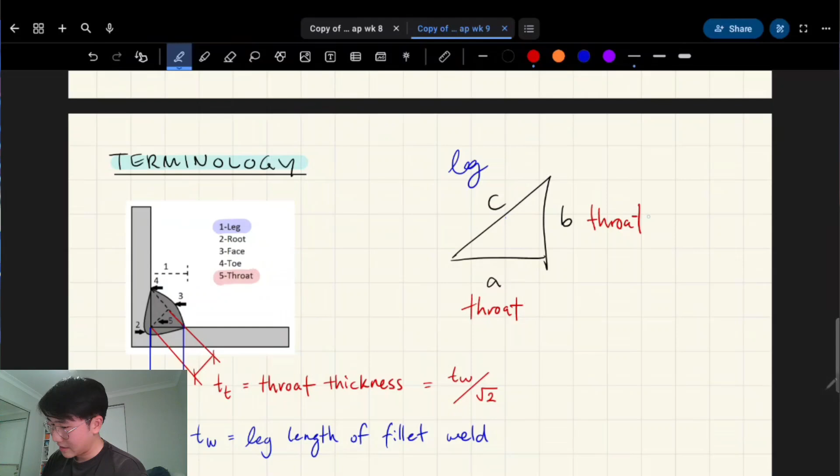and there's two throats. Even though there's actually only one throat. Okay, it's a bit confusing, but mathematically we consider it the other way around because I think it makes more sense. There's a leg. There's the leg. That's another leg. That's the throat, right?

So the throat is actually the smaller shape. This is almost like a year 8 maths puzzle, right? Because we have throat, and the leg is actually the big one, the hypotenuse, right? Make sense? But physically, we have two legs and one throat. Okay, hopefully that makes sense.

Fuck. Right. Yeah. Anyway,

there's formulas for the minimum and maximum size that a fillet weld is allowed to be, right, along an edge. So it's based on we have 2 plies, right? Say we have 2 plies like this, 2 members, and they're being welded together. Have this fillet weld, right? And maybe you have a fillet weld on the other side, who knows? If we're looking at that side on, that's what this looks like, right?

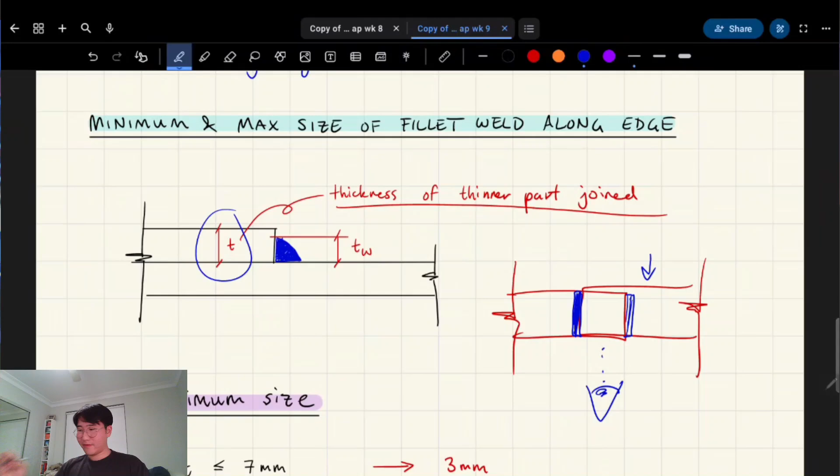So that top member, the one that's sitting on top, let's kind of draw this the other way. Anyway, you get what I'm saying, right? That plate thickness is T, right? You know what? Actually, wait. Sorry, it was bothering me. It's like this. That's the weld that was under. This is the weld that's on top. Okay, that makes more sense.

That member has a thickness T, right? Whereas the leg has a thickness of TW. TW is the weld thickness, I guess. Sorry, the leg of the weld. There's some rules for what the minimum and maximum is allowed to be.

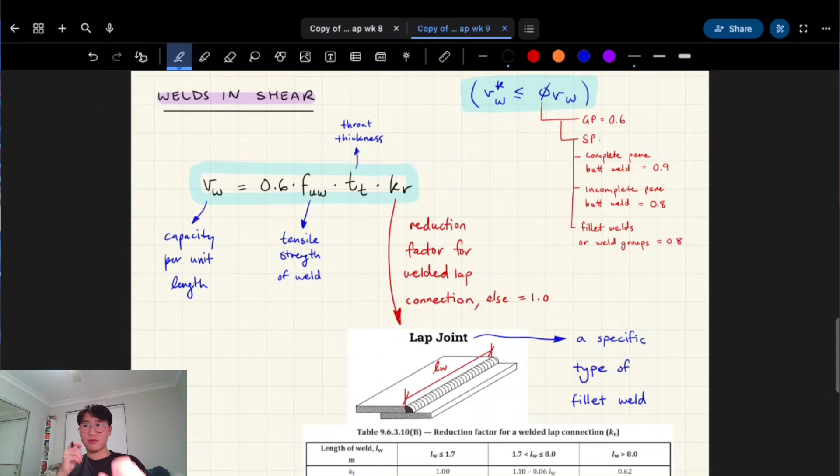Okay, so welds, right? We just do shear design for welds, okay? And unlike for bolts, there's not a table for it, right? Because this is more things that depend, right? Like the throat thickness is not standardized. You have to design for like a throat thickness, whereas bolts come in standard sizes, right?

The other thing to note about welds is that you do everything in terms of kilonewtons per meter, right? And this is also kilonewtons per meter instead of your normal. You know how for member design we usually do something like this, right? This is in kilonewtons, and this is in kilonewtons or something, right? Or newtons maybe. For welds, we do it per linear meter, right?

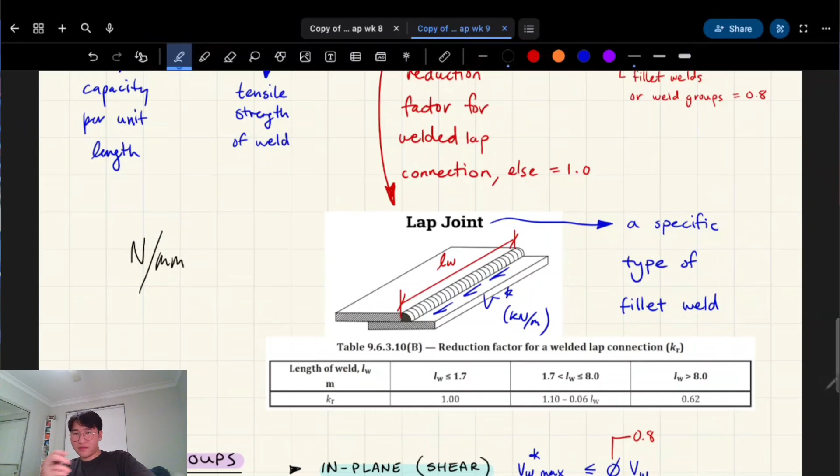Oh, yeah, okay. Because essentially we're saying it's shearing V star amount, right? Per meter. Kilonewton per meter. Because it's all linear, right? Is the meter assumed? Like per meter? It's like in geotech. When you're designing a strip footing, you just design everything per meter. Yeah, okay. You could also do it in newtons per millimeter. I can't remember what the question does. Maybe we'll see in the question.

Okay. But for weld groups, I've just put some dot points here that I want to run through because I think this is the simplest way to explain it. So each weld line has a centroid, which I've drawn as a blue circle, like here, right? The weld group overall, so all 3 of these welds that you see here, has a centroid. That's the ICR, right? Instant center of rotation.

We want to find this ICR and set our coordinate system there, right? But what we usually have to do is set it to a known point first in order to find the ICR, and then we start doing the calculations from the ICR, which is how you're supposed to do all the calcs, right? And we also have to calculate MO, which is the resultant moment at the ICR. And you do that by summing the moments about the ICR. So if all your forces and moments were over there, you have to find the eccentricity and set it back over here to where the ICR is.

I just said a bunch of acronyms and shit. Are you guys kind of following? Yep. We just move everything to the ICR. That's the bottom line, right? Yep.

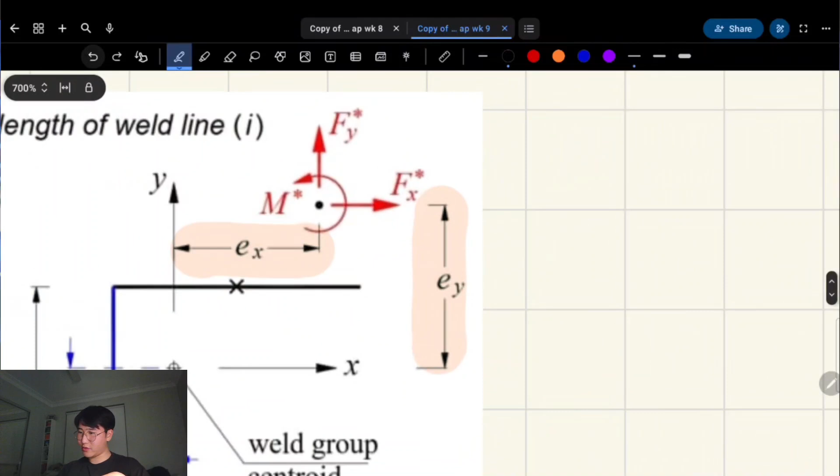So in terms of a step-by-step, it's like what I said. We have to start with a known coordinate system. Here I've started in the bottom left, which is marked in red. Then we find the ICR, and we set the new coordinate system there. So that's what's in purple, right? Done. Then we find the eccentricity of the loads, right? Same thing as before. So you find the lever arm, the perpendicular distance to this force, find the perpendicular distance to that force. That's the eccentricities, right? And we find the resultant X force, Y force, and moment, right?

Those three things. Here's where the formulas start looking whack, right? So polar moment of inertia has this weird formula for welds, but we need the polar moment of inertia. We don't need Ix, we don't need Iy. The only reason we needed those before was to find IP, right, for bolts. Here we can directly find it using this formula. So this is your linear polar moment of inertia formula, right? And using this formula, that should be a lowercase, we can find the shear per unit length at any point along the weld using this, right?

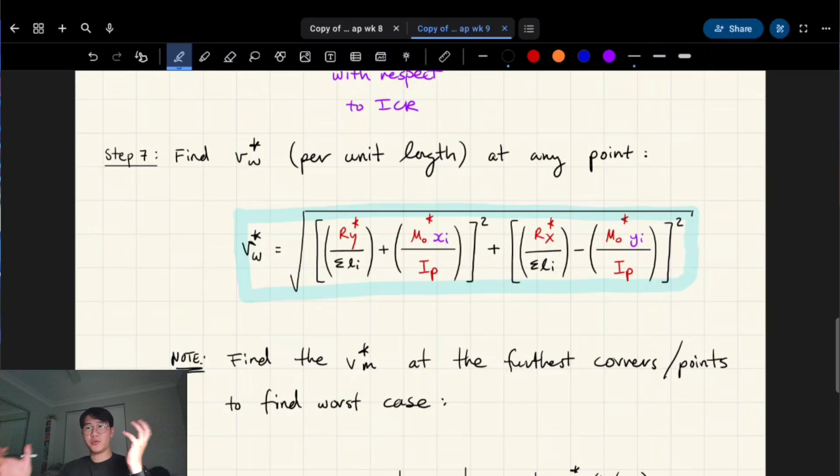So given that information, remember how we said before for that example with the bolts? The ones that are furthest away from the centroid, like here, that's the centroid. The ones that are furthest away are the ones we have to check, because they're the worst case scenario, right?

Now for a weld, say the one that we drew before, I'm doing blue. And that's the middle here. Where do we have to check? Do we check the centroid of the lines, you reckon? Centroid of the lines being here, here, here. Where do we check?

Would it not just be like the fringe cases, like at the extremes, like at the end of the weld itself? Exactly, you're exactly right, that's what we have to do. So we set these corner points as A, B, C, D, because that's where the worst shear would be, right?

So if I were to draw this, say the worst shear is here, and then it gets a bit better, then it gets a bit better. I'm exaggerating this. Might be okay here, might be okay here. It's quite small. Maybe it gets bigger again here or something. But it depends on what your moment is and what your forces are. So check the corner points, the extreme points, right?

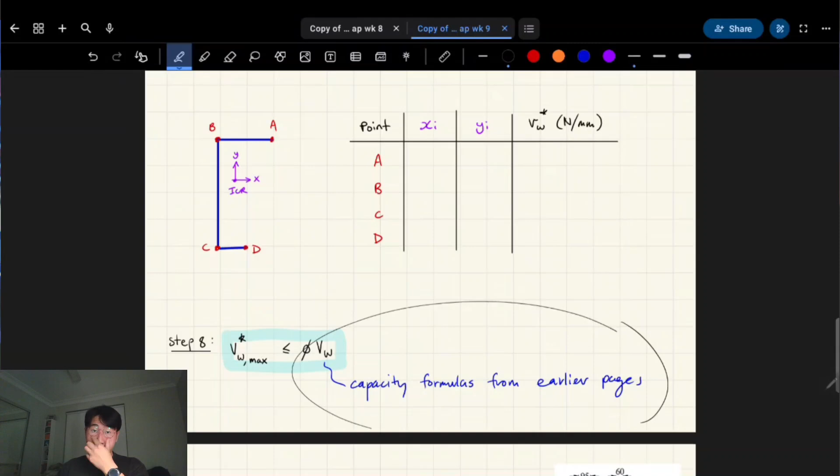And that's it, and you find the capacities using the formulas from before, but the formulas weren't that hard. Actually I might export another copy of my notes because I got a bit lazy. I wrote capital V for a lot of these, it should be lowercase v. But yeah.

Everything's just laid out here. Just remember, you gotta find the throat thickness, so we have to use that reverse Pythagoras formula to find the leg lengths, right? And here we were finding the maximum force that was allowable for this weld, basically.

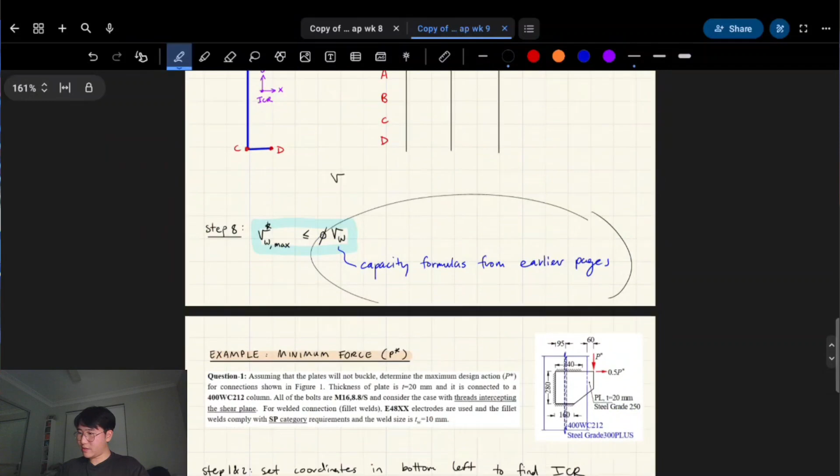Okay, any questions? A bit curious, like the IP formula for the welds? Yep.

It has the x squared plus y squared. That's the same as the bolts, right? Because the Ix was x squared and the Iy was y squared, and the IP for the... Yeah, you're right, yeah, you're right.

So the difference is that we consider length. Everything's to do with length because it's one-dimensional. But yeah, you're right, pretty much. But then there's an additional component for IP in one dimension. Because if you have zero dimensions, that's the bolt case, then you're just doing this part, right? Yes, yeah. Cool.

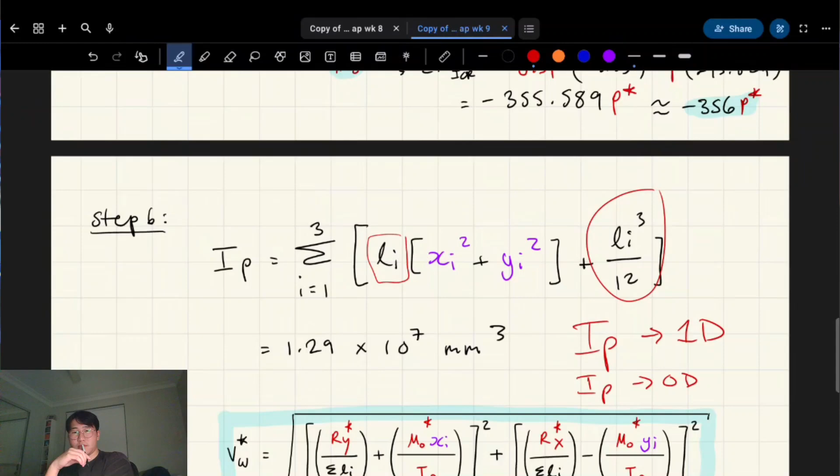Yeah, I'm trying to think. Also, the table that you refer to with the shear values, would you always get cases that are actually in the table, or can you get stuff that's outside the table? I mean, the values. Oh.

Think about it like this. There's actually heaps of grades, but there's 3 reasonable grades that it can give you. And they already said in the course, at least when I did it, they don't do 10.9 bolts. So you're already left with just this and that. They give it to you according to the grades. And then there's only so many bolt sizes that are manufactured, right?

So think about it like this, like you go to a Lego store. They're not just gonna give you a piece of Lego that's like 50% bigger than another Lego because it's not gonna fit with the other Legos. Same thing with bolts, there's standard sizes because everyone uses those sizes, the universal sizing. So that's what M12, M16, M20, M24, M30, M36 is. They're not gonna give you numbers outside of that.

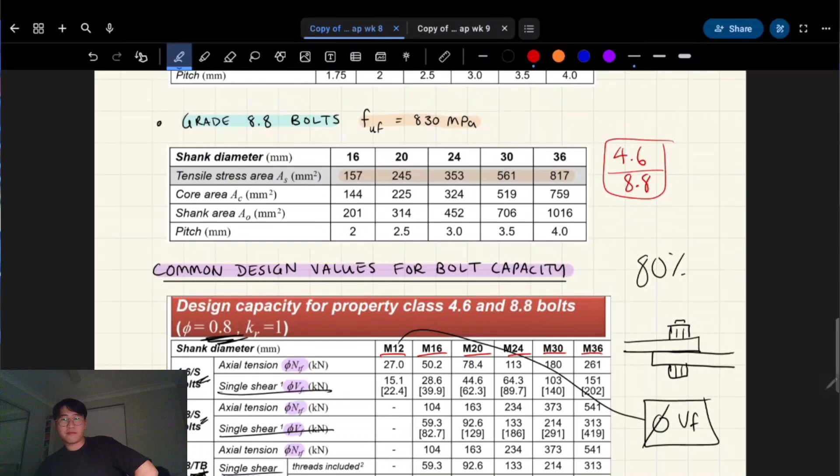So realistically, this table is pretty thorough. That's why you can use the table for bolts, but not really for welds. You can't, each weld has a different thickness, and it just depends, right? Okay, yeah, any other questions, guys?